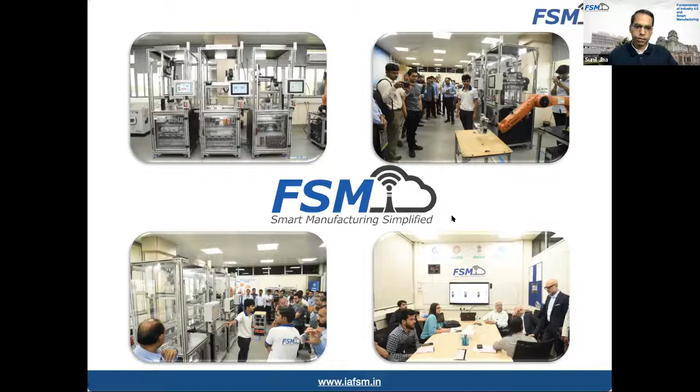Quickly introducing the FSM team working with us right now. We have directors representing industry as well as IIT Delhi. This entity, FSM, is basically co-owned along with industry. So we have Mr. Ravi Agarwal, Mr. Anup Wadhwa and Dilip Sahani from industry, representing the Automation Industry Association. And Dr. Anil Wali and myself are the representatives from IIT Delhi in this foundation.

Then we have a set of young engineers working with us day and night, experimenting with these technologies. We have people in automation and IoT, Mr. Arun Kumar and Vishnu Kumar. We have Rajesh Bhatt working on robotics and the implementation of robotics projects. Vaibhav Anand working on software development, whether it's AR implementation or backend work with Python and JavaScript integration, so he's developing those applications. And Naman Kapoor is looking after the administration at FSM.

So I'm introducing these people because during the course we have to go through some hands-on experiments and learning, and these are the people who will be helping you attempt that part. Then we have a lot of interns coming to FSM working on different technologies. Right now, Ronak, Atul, Omkar, and Amit are all working as interns with FSM.

The course faculty that we brought in for this course, as I briefed about the 6-day structure, includes people from various industries who will be joining these courses and the respective lecture sessions. We have Mr. Anup Wadhwa from Automation Industry Association, Mr. Kalyan Ram from Electrono Solutions, Mr. Sudhanshu from Pepperl and Fuchs, Pankaj from Rockwell Automation, Mr. Piyush from MathWorks, Tushar from PTC, Mr. Sarup Chand from Adroitech, and Mr. Praveen from Deloitte. So we have brought these faculty members from industry so that along with me, they will also share their knowledge and learning gained in the domain of smart manufacturing.

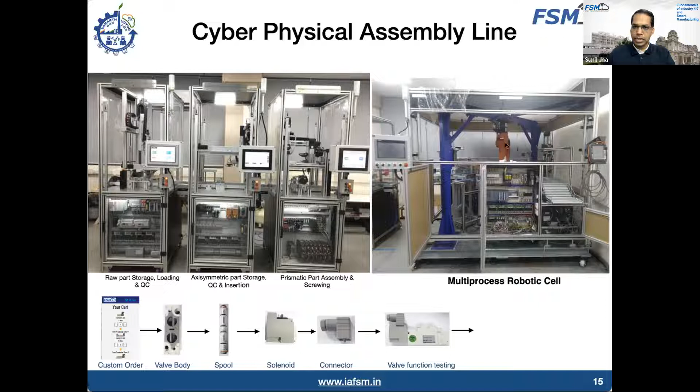Whatever these three stations are able to assemble, this multi-process robotic cell is also able to assemble the same component. But apart from that, it is also able to do functional testing of this developed component, which goes through testing and finally packaging. So starting from web ordering to final dispatch of the assembled product is all demonstrated in this small assembly line.

As this assembly line is going on, various technologies are in operation. The idea is that through this simple assembly line, we will be able to at least touch upon all the technologies and how they are going to help us in transforming the way manufacturing operations take place.

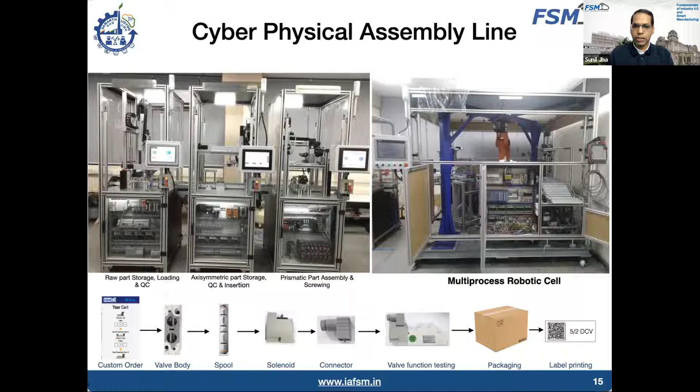So this is the facility, and another facility that we are working on. The previous one is the state-of-art facility which has been developed from scratch. We designed all the machines and systems and created this basic cyber physical assembly line.

The second facility we are working on and implementing is based on a cyber physical factory concept, which is basically a mix of new and old equipment. The idea is that most Indian industries come across this scenario where you have old machines which may not even have sensors and controllers, some CNC machines with PLCs, and some advanced new systems like robotic systems. We try to bring all these facilities onto one platform.

We are trying to transform our central workshop into a cyber physical factory, building everything from scratch with connectivity, upgrading basic legacy machines into smart machines, and developing the whole smart factory concept. This is a micro production system connected with automated material handling robots that you can see in between - a mobile autonomous robot with a collaborative robot on top, doing all kinds of material handling within the shops.

This is the one facility we are developing along with the previous cyber physical assembly line. This one is more related to manufacturing, so all machining, forming, welding - these operations are going on in this facility.

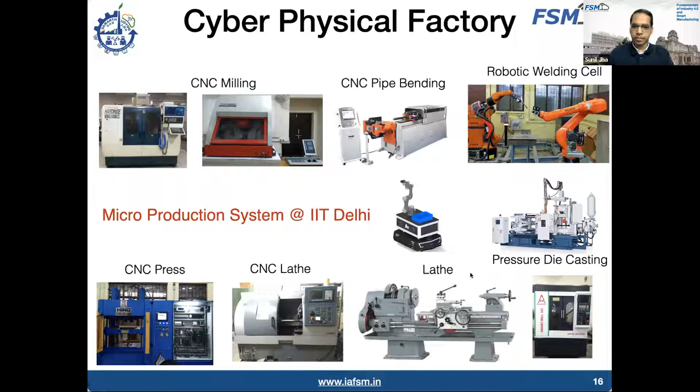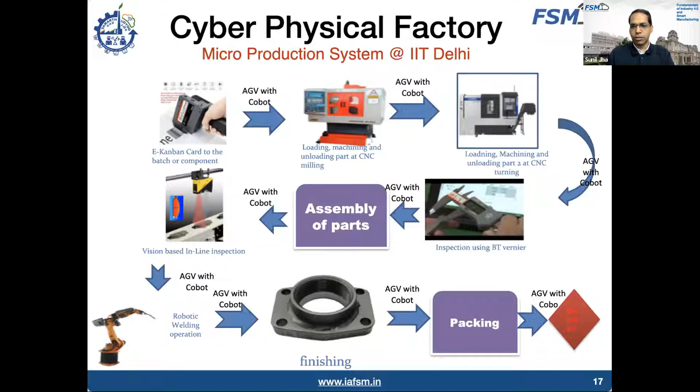We would like to demonstrate how track and trace will work in this case. Starting from basic raw material tracing, the material movement to different machines will happen, quality inspection can be implemented showing how inline quality inspection can be done, and finally the finished part can be dispatched to the customer. So this cyber physical factory is going to demonstrate all these functionalities.

Another facility that we have created is on the training part, because that's very important. Whatever basic infrastructure we have created is on the machine side, but at the same time we also want to transfer the learning to the learners, whether it's a student or people from the industry. So this smart manufacturing training system we have created in our lab, and we'll try to give you some hands-on learning on this system during the course.

The idea is that we should have a remote accessible training system, because these days we may not want everyone to come to the lab to learn it. So we will be providing these training systems accessible remotely, so they can learn these technologies we are talking about. We have this smart manufacturing training kit connected with electromechanical hardware as well.

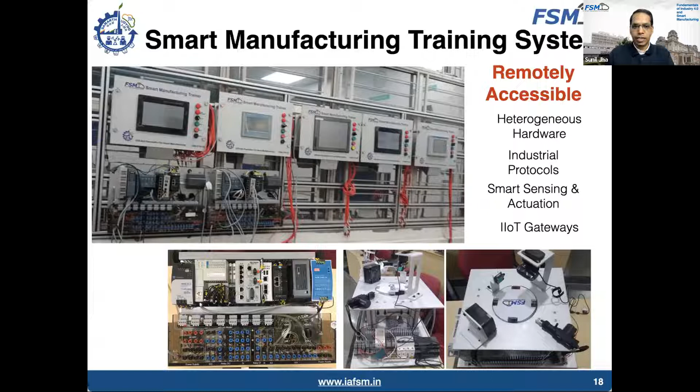This is a representation of a machine having 4 different stations with sensors, RFID, because I was hearing that you are implementing RFID projects. For those starting these initiative activities, it covers everything from basic data capture to taking it to the IoT platform and developing applications for the customer, showing how everything works in this scenario.

So that is the idea of creating this smart manufacturing training system. These are the trainers created on state-of-art industrial automation hardware, whether it's an IoT implementation on these kits or the smart managed switch for network security.

Hello. I think there is a glitch in Dr. Jha's connection, so we'll just wait for him to join us back. Yeah, he's reconnecting. I think something wrong with the network, it immediately gets switched off. So I'll just come back again. Yeah.

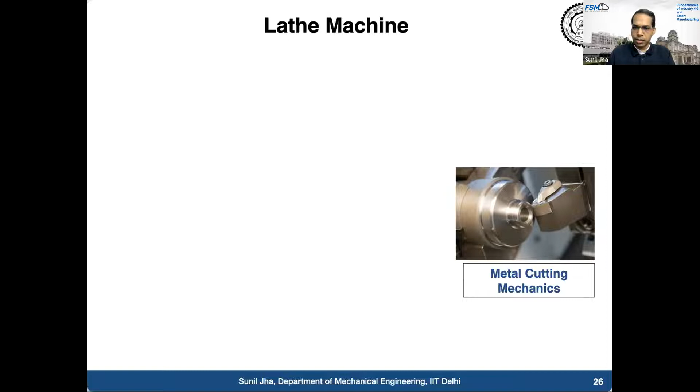We need an understanding of metal cutting mechanics, because someone has to figure out how metal can be given a different shape. If you want axisymmetric shapes, the metal cutting mechanics should be understood. There should be a cutting tool with certain angles, and when we engage with the workpiece material, we will be able to remove material in a particular shape. With that understanding, people came out with the concept of the lathe machine.

They understood what various relative motions are required in this lathe machine. The whole understanding of the mechanical system, the machine tool, and how you will be powering these machine tools should be there. This lathe machine started with the power source as a steam engine during the first industrial revolution itself. So the main source of power for this machine came from a steam engine, while implementing the metal cutting mechanics with the different relative motions given to the tool and the workpiece.

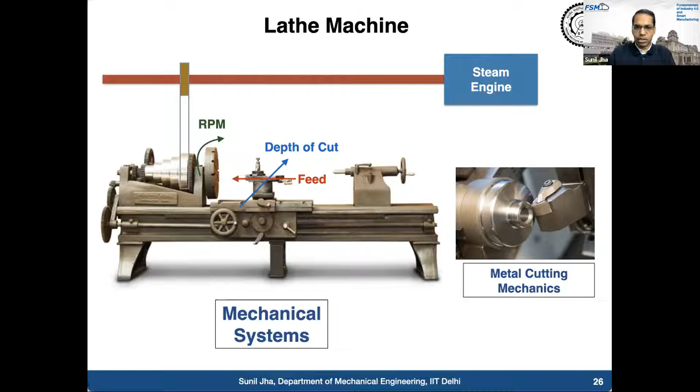That is how we can understand technologies starting to develop when we talk about Industry 1.0 - when you know the basic mechanical systems, and you try to build basic machines driven by the steam engine. That's how the first industrial revolution starts.

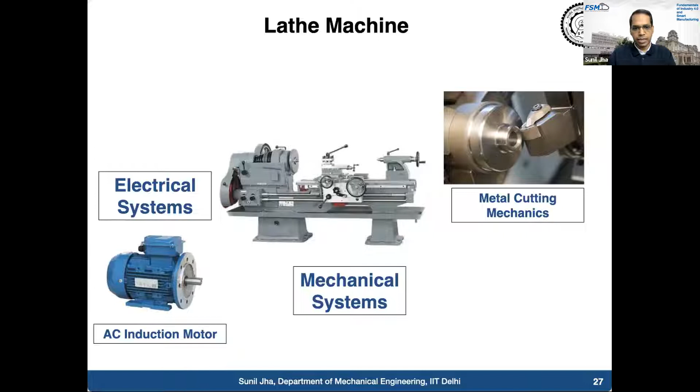Then we talk about the lathe machine again - the same mechanics is implemented, and metal has to be removed from the workpiece in the same way. Apart from the mechanical systems, you need to understand electrical systems as well, because now your machines are no more driven by the steam engine - they are driven by induction motors. So people with electrical system understanding put this motor together with the machine. The rest of the operations remain the same; only the motive power, the drive power, comes from the AC induction motor.

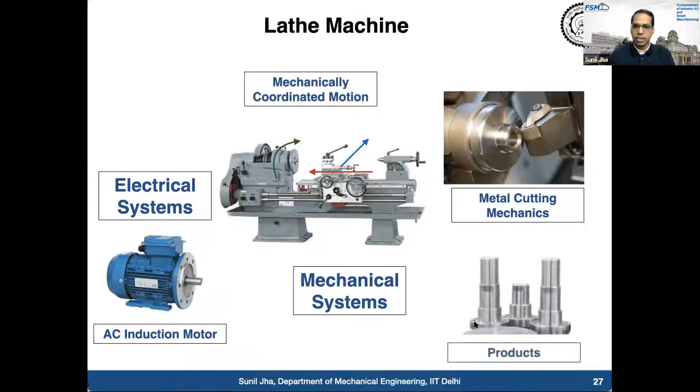The motions - the mechanically coordinated motion, whether depth of cut or speed and feed - are all given manually in these machines. So the understanding of basic mechanical engineering is still important, and you will be able to produce these kinds of parts.

Then if you go along, the transformation happens - whatever motions you give to the machine, as I mentioned in the previous slide, are all controlled by servo motors. That's how the concept of computer numerical control machines was developed, and we're all familiar with that since you might have seen CNC machines. As a mechanical engineer, we understand the CNC machine; as an electrical engineer, you understand the CNC machine. We also understand what kind of programs are running in this machine controller.

If you see how technology has transformed - starting from basic metal cutting mechanics, to how the system is driven by the electrical motor. Initially only the spindle part was taken care of by the electrical motor. But later we realized that whatever mechanical motions the operator gives to the part, in terms of relative motion between tool and workpiece, if coordinated and given properly, you can maintain better quality and dimensional accuracy. This kind of system developed with a lot of intervention of electronics and computing. So you need to have a mechanical system - you can't go away from that, because that is the actual foundation of your machine.

Then we need to bring out the electrical systems to drive the whole machine tool. So you will be having servo motors and drives running the spindle and the various axes of motion. And finally, you will also be bringing out the computing system, because now I would like to give instructions to this machine in the form of alphanumeric codes. That is the part program we put into the machine. Then the machine has to understand that part program and generate a suitable motion to cut the part.

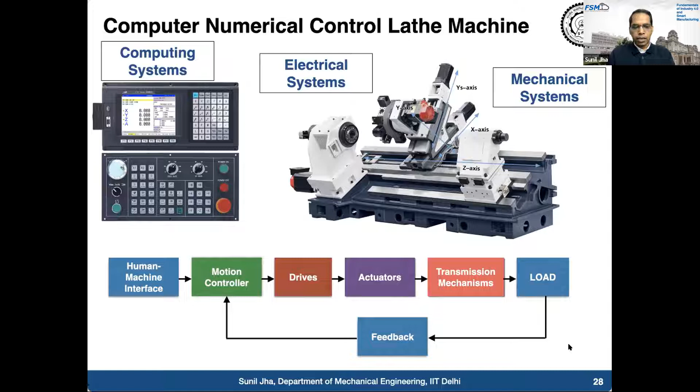So if you see that journey that has moved from the basic machine to this CNC machine, this has all been done as a part of Industry 3.0. In Industry 3.0 we witness all sorts of automation implemented in the form of these CNC machines, robotics and so on. Now, when it comes to Industry 4.0, what additional thing would we like to do here?

So I'm just giving you an example of a smart lathe machine. Same machine tool, nothing is going to change much in terms of the basic metal cutting mechanics. The only thing we are looking forward to now, beyond the conventional automation, is to build more services on top of that.

So what we would like to have is automation that doesn't merely give product quality. What we are looking at, even on legacy or conventional machines, is how we will be able to ensure that product quality is maintained irrespective of the operator operating it. So we need to build services which will help in getting the right product quality from this machine.

We'll also be looking at monitoring the health of the machine continuously, along with its precision. When we say health, we certainly mean the precision of the various components or sub-components used in the machine. And we also look forward, when we talk about conventional lathe machines, to guiding an operator in some way so that we will be able to maintain the product quality we are talking about.

To achieve this basic functionality on conventional machines, we need to think about the kind of integration we are all doing, or may be doing.

So I have heard that you started some kind of Industry 4.0 projects, and they may look similar to this. I'm just giving you a very crude or raw example of a conventional legacy machine. If you have a CNC machine, you have a better prospect of integrating that machine, but let's take a very raw case here.

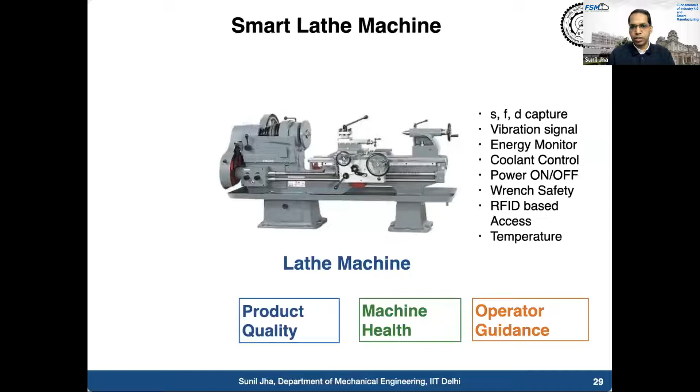My intent is that I should capture some of the important parameters from this machine. So I will be thinking about what are the critical parameters for this machine. We understand that speed, feed, and depth of cut are very critical for a lathe machine, and that directly translates into product quality. So we need to think about capturing these parameters from these machines.

Then, when we talk about vibration in the system, we are interested in capturing some vibration signal from this machine. Power consumption by this machine is also a good indicator. Sometimes when parts wear and tear, there's a large amount of energy consumption, or a change in the trend of energy consumption by the same machine for the same part. That's also a signature we need to capture, so energy monitoring is an important part of this.

Certainly some kind of controls we would like to implement, such as coolant control and power on/off of the machine to be monitored. There are certain safety measures that can be implemented on this machine, because we are talking about Industry 5.0 now, which is also about making the whole system safe for humans to operate and work in this environment. So safety is one area where such features can be implemented.

RFID-based access, because we want to record who is operating the machine and which part is being produced by that person. So there's some kind of traceability of the components, as well as traceability of the operator who has used this machine. We have to provide some kind of access system here, so RFID-based access will also be a part of this, and certainly monitoring of the bearing temperature.

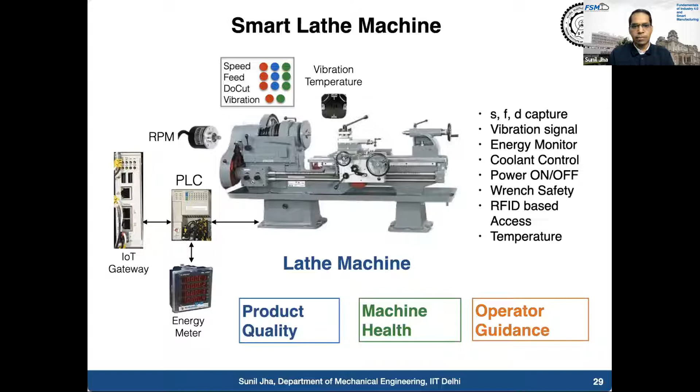So we are looking forward to this kind of implementation when we talk about Industry 4.0. The cyber-physical connection is a very important part of this implementation.

So the four design principles and goals for Industry 4.0 — what we are looking forward to first is interconnection, the connectivity between the machines, devices, sensors, even people, basically how they will be able to communicate among themselves. That is the first design principle, that whenever we are trying to implement Industry 4.0, connectivity is an important pillar.

So those who have already started this journey may understand this: the first thing is to extract the data from the machine and then take it somewhere else. That somewhere else could be a server, or another machine or system that will make use of that information, or it could be a mobile application where we will be taking this data.

So this interconnectivity between the machines, the sensors, and the people is a very important element of this. Now, once you establish connectivity, the second design principle is information transparency, because that's a very important pillar of Industry 4.0.

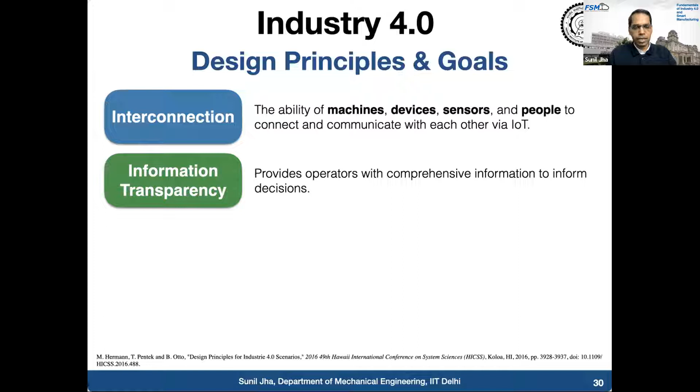As we implement smart manufacturing, information transparency will be there, providing operators or decision makers this transparency. They will know that information, and all decisions come out with the knowledge or information they are looking at. So informed decisions come out from the actual data once we implement information transparency. Another design principle for Industry 4.0 is technical assistance.

We are looking to empower people with the help of technology. So Industry 4.0 doesn't only talk about machines and connected systems, we are also talking about assistance to people, actually - the technological facility of the system to assist a human in decision making and problem solving.

So with the help of machine learning and deep learning implementation, inferences can be made based on the data, assisting and helping in decision making. At the same time, to assist someone to solve a problem in the field, technological assistance in the form of technologies like augmented reality will help guide people in problem solving. This is another important pillar for Industry 4.0.

And lastly, we are talking about decentralized decisions. Rather than everything coming to one central system and the decision being communicated to the machines, we want decisions to be taken by individual decentralized components, or different hardware near the machines themselves, or the machine controllers themselves - the distribution of decision making. So decision making should happen at the machine level itself, with the help of the cyber physical connect.

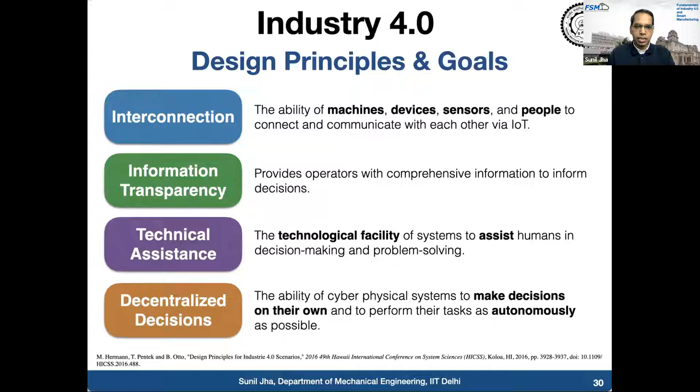So this is the basic design principle, and all the technologies we will talk about will at least try to implement some of these design goals. Now let me take you to this important slide on manufacturing challenges, because whenever we talk about Industry 4.0 or smart manufacturing, we always think of the manufacturing challenges already existing in the facility we are dealing with. When we talk about Industry 4.0, we see it's a next generation of technologies for a futuristic manufacturing setup.

What do we do with the existing manufacturing challenges? Our manufacturing challenges are always in the form of either higher rejections or very little insight available on what is going on in the factory - lack of operations insight. That's why you try to connect the machines, connect the assets, and build more dashboards, because that brings out the insight. Wherever it's not available, you're always in the blank, not knowing what's going on - where is the fault, where is the problem area in manufacturing or maintenance.

Lack of operations insight is a very big driver for this, and most manufacturing facilities and setups experience these issues. Then there's suboptimal process control - we run processes and manufacturing operations, but they're not running at optimal conditions. Sometimes we tune these operations initially, but then we aren't continuously monitoring whether they're running optimally or not. So suboptimal process control is another challenge we always face. Long setup and production time is another challenge, and unprecedented downtime is very critical whenever an important asset fails all of a sudden - that's a very important part of your manufacturing setup.

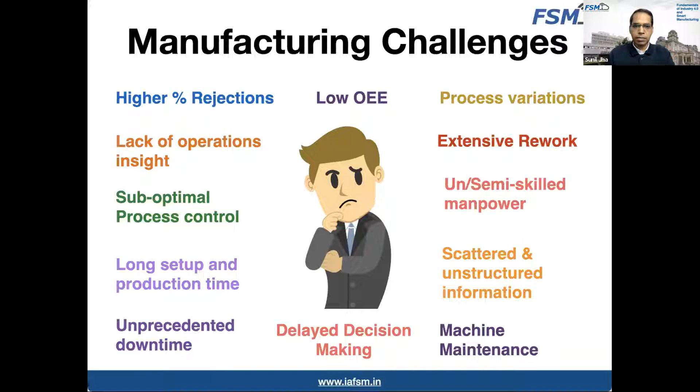So this is the slide we need to understand in a better way - on one side, we all are familiar with our own challenges. Maybe after this understanding and discussion, you may write down your own challenges - that's a very important part. I have already written based on my interaction with the industry and understanding - these are some of the challenges. You may increase that list further.

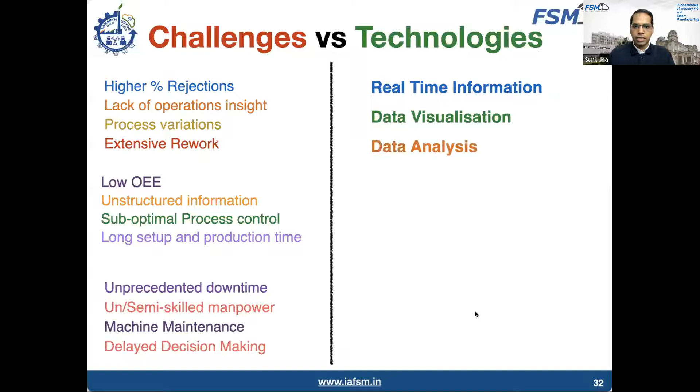And on the other side, in these 6 days, you may come across and understand the various technologies that we will be sharing with you - real-time information, data visualization, data analysis, remote maintenance, smart machine interfaces, augmented reality, AI machine learning. These are all technology baskets or components relevant and important for smart manufacturing understanding.

These are two different scenarios - on one side, you have your existing factory challenges or setup challenges, and on the other side, we are trying to learn more and more advanced technologies. Now, unless we marry them or match them - which challenge is getting solved by which technology component - unless we come out with that visualization and understanding, this learning will not be helping us. It is not going to be implemented. So it's a very important exercise for all those who are having field experience and learning these new technologies.

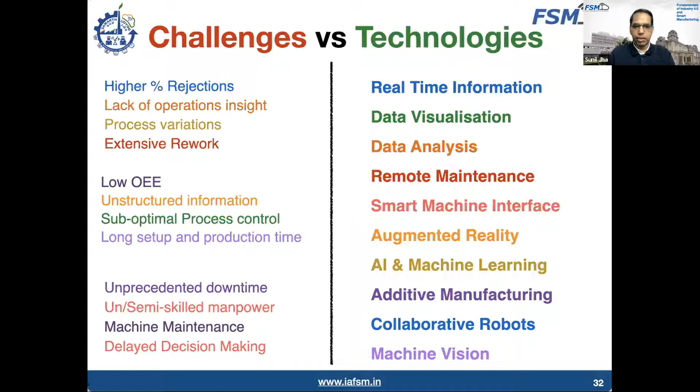They should understand that this particular technology is going to help me in solving this particular challenge. So please be ready to prepare this kind of list for you. As you go along with the various technologies listed on the right-hand side, as we discuss more detail about these technologies, you should start thinking and matching that - and that is something coming out as a project. Whenever you start thinking about implementation of these technologies to take out some of these challenges from your existing setup, then you are implementing Industry 4.0.

Let me give a quick glance of a digital enterprise, because that's a very important thing we are moving towards. Today we are trying to implement digitalization, trying to do everything digitally. So when we talk about the digital enterprise, we need to understand what exactly we are doing. When we talk about manufacturing, we are doing design, manufacturing, producing some products. To manufacture the products, we need to bring together multiple components, sub-components, raw material. So the supply network is very important, and the distribution of the final finished products. These are the key important pillars of all manufacturing setup.

Then you see the word 'digital' in front of all these terms: digital design, digital manufacturing, digital product, and the digital supply chain network. Everything is connected together with information exchange between all the digital environments in the enterprise, and that we call a digital thread. It means all the activities in the plant and the enterprise are now being shared digitally. This highway of communication, which shares this information digitally, we call a digital thread. How you will establish that digital thread, how you build it up, is an important part of this. We are certainly looking forward to migrating our existing manufacturing setup towards digital enterprises.

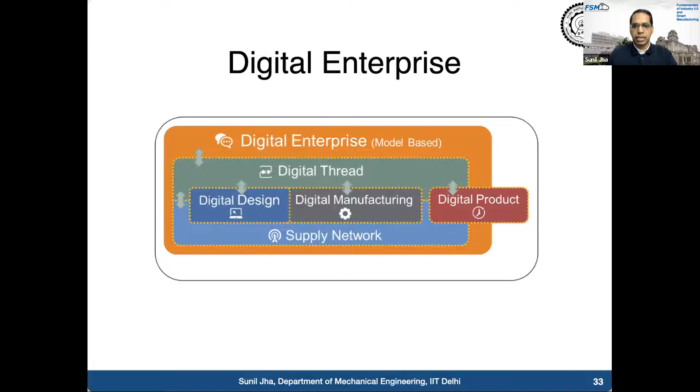So this slide is just giving you a quick glimpse of what exactly digital enterprise means and what digital design is. I'll zoom into this a little bit to understand what exactly I'm talking about. When we talk about the digital enterprise, we'll be talking about the digital organization, digital enterprise content management, enterprise risk management, the research part.

Then as we go deeper into the manufacturing, when we say digital design, we are all familiar that most design activities are done digitally today. We have to use CAD packages, analysis packages, design the product, evaluate the product reliability. So all sorts of digital tools that help me perform these activities make up digital design.

Then we talk about digital manufacturing and processing. Here we need to monitor the manufacturing and processing systems, control them digitally, and we also perform some simulation before we actually take it up to manufacturing. If we do all these activities digitally, we call it digital manufacturing and processing.

Same way, we are looking forward for the products. Now no more products are made without sharing something, because when we talk about the digital economy and digital enterprises, we want these products to share information back to the system. So we are looking for more digital products which will share information about their utilization and their current state. That is how digital products are coming up.

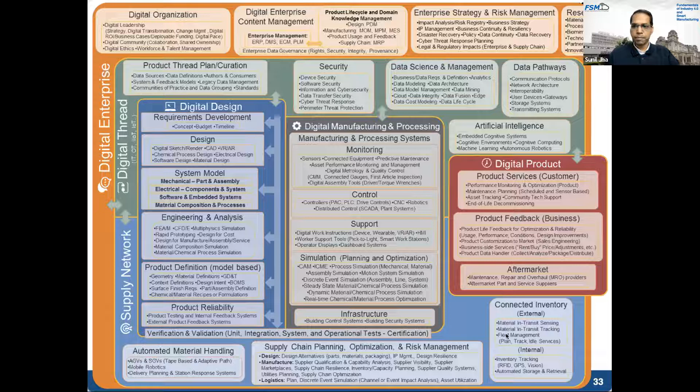What are the technologies which are going to shape the future of manufacturing? Some of these we are accepting today, some we still think are futuristic. We may need to learn them, but later on they may not impact activities right now. But they are going to impact your manufacturing setup - that is what this report says.

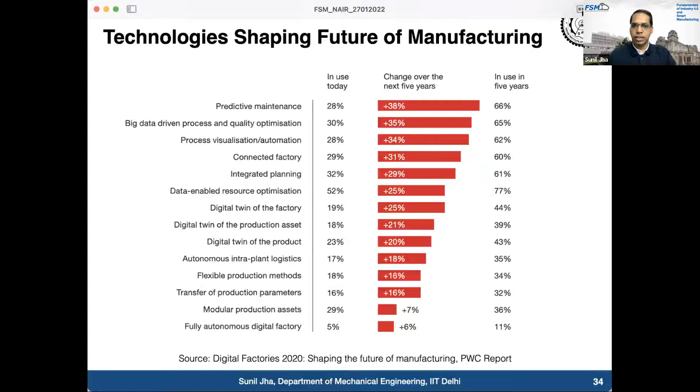So we are talking about these technologies. We need to learn these technologies ourselves, and we also need to learn how to implement them, because most of the time those who are developing these technologies may share only limited know-how with you. It's very important to understand these technologies in depth, to the extent that you will be in a position to implement them yourself. That is the idea behind this FSM - that we all are spending our time understanding these technologies so that we can enable people from manufacturing to at least implement them.

So we are working on these technologies in FSM. Now let us come to this assignment, which will be due for submission by tomorrow. I will be enabling this assignment on the website. It's on redefine the Industry 4.0.

Now, when I was mentioning about the Industry 4.0 design goals, and the challenges in manufacturing, from that perspective, how do you see Industry 4.0 helping in whatever initiative or activities you are doing? This assignment is about identification of the key improvements in the next 5 years. So whatever operations or activities you are doing right now, can you define, can you write down what Industry 4.0 means to you?

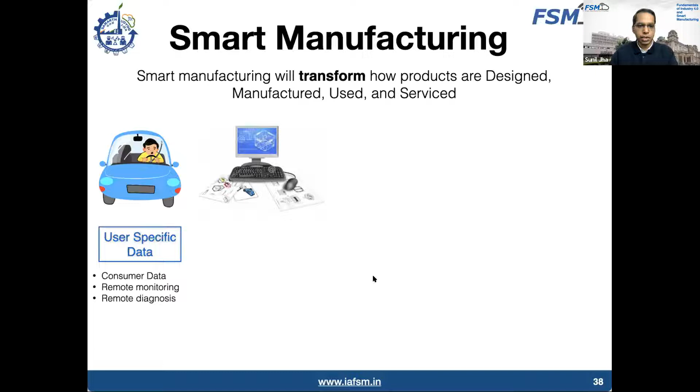In the same way, manufacturing products also start with user specific data, because when we talk about customized manufacturing, we talk about starting the whole activity from user specific data. You have to get consumer data captured from products already in the market, or from various sources, as input to start your design process. So with user specific data, the whole design process begins, product design using customized data.

You may explore this, as I'm sharing it within the broad concept of Industry 4.0. People are talking about customized design and customized products, how it is relevant and in what scenario it helps. That is what is coming as a redefinition of Industry 4.0. This may or may not be applicable, but if it is, it's nice. Otherwise, you can redefine how this whole activity applies around the activities you're doing right now.

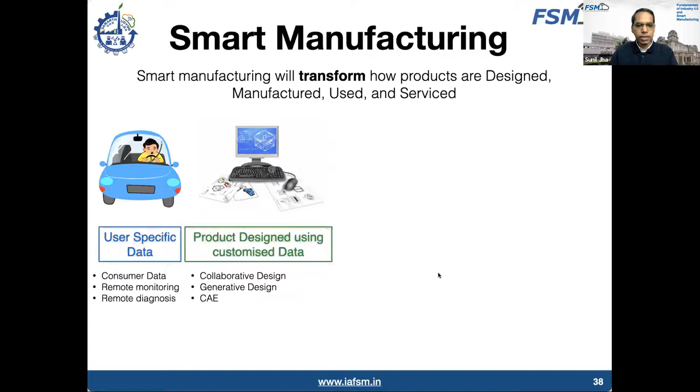So we are talking about the capture of user specific data. Then from that data, we would like to design a product which is user specific, of a certain need, and which helps the customer in some sense. So we are talking about technologies that help us design a product which is user specific. Then we are talking about digital manufacturing technologies, how you are going to manufacture this product.

So all sort of digital technologies are involved - the data-driven operations, the flexibility in manufacturing, how real-time changes can be implemented. So all these technologies are playing a key role in implementation of digital manufacturing.

Post that, once the product is delivered, the input from the remote product, or the product being in use, how the data from that product is going to help. So remote diagnosis and reconfiguration can be possible on such connected products. All sort of fault diagnosis, the kind of maintenance that can be given to the product by the engineer, the service engineer, or sometimes the user, and collecting the part failure data for improvement of the solution.

So if you see the whole spectrum of the digital connect here - starting from user specific data, designing the product using the customer data, then manufacturing the product accordingly, and finally the product that is delivered is continuously monitored and gets connected. So we talk about smart manufacturing in totality like this, and we will be embedding the intelligence at the different stages here. So that is what we try to manufacture with the intelligence. This is what we understand the smart manufacturing concept.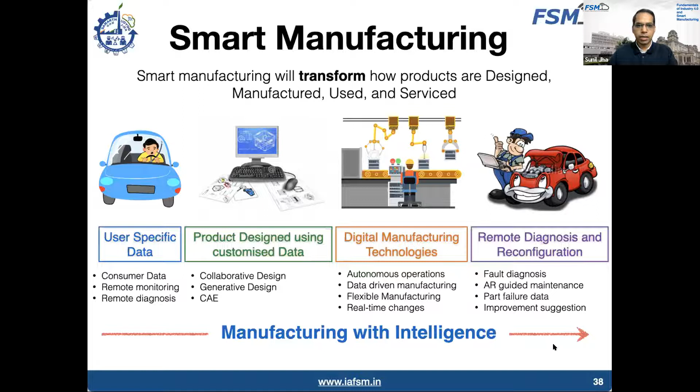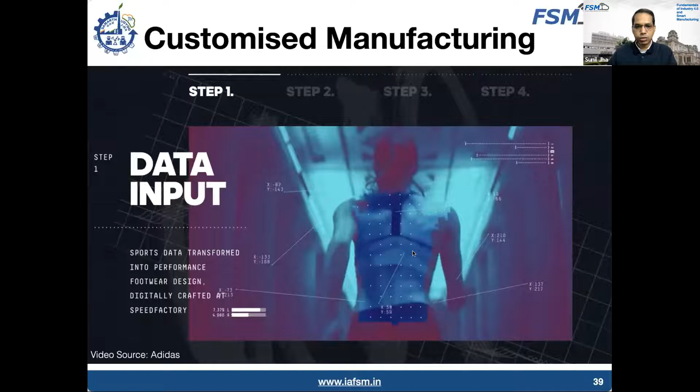Let me take you through this quick snapshot captured from Adidas. The 4 steps which I have just explained to you are being reflected in this video. Adidas are basically manufacturing shoes - this is all about how the shoes are being designed.

The initial data is captured from the shoe itself. It's an instrumented shoe which has some sensors. Then based on the user who is going to use it, the data is captured, and using that data the product is being designed.

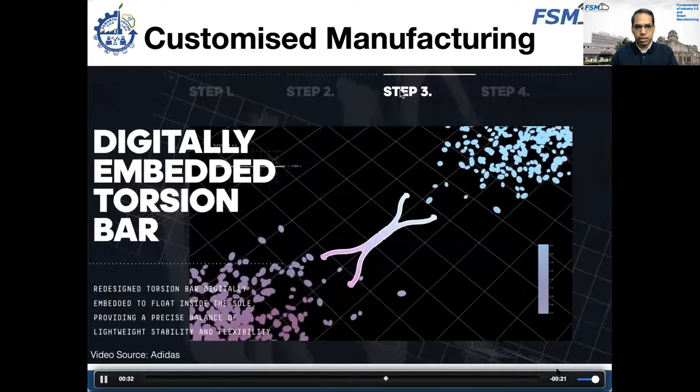There's a unique member inside this shoe which takes care of the forces and torque, and that is specific - how the strength of the whole shoe is designed is based on user specific data. Finally, this torsion bar is embedded into the product. So now this unique customized torsion bar is embedded into the product, and then there are advanced manufacturing processes so that you can make this product as quickly as possible.

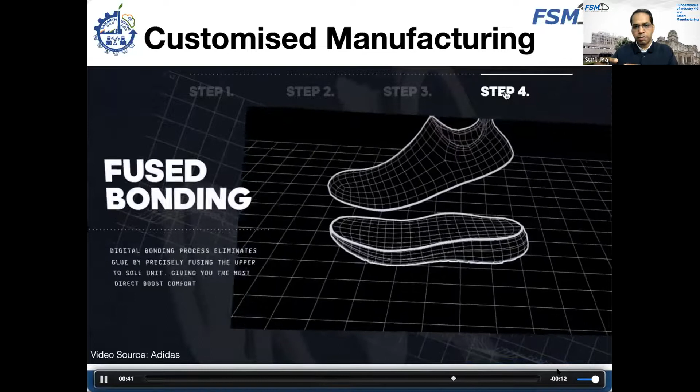Started from basic input data, the design of the whole shoe has been done based on who is going to use it, for which sport he is going to use it. And this unique element of the product is digitally designed so that it will meet the requirements of that application. Finally, suitable manufacturing processes enable it to be manufactured in this fashion.

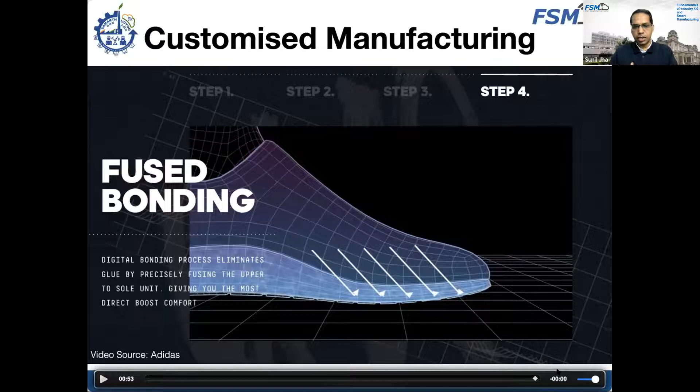So the idea is, though I have given an example of a shoe, these 4 steps are equally applicable to any product we will be talking about in terms of manufacturing. So then you can think about how this can be taken to some of your applications or some of the services you would like to deliver.

Now, when it comes to smart manufacturing, we need to see the economic potential. What is the economic potential here? Let me just quickly brief about that.

As I was mentioning earlier, it has to help the acceleration of the decision-making process and the adaptation. So there are two important advantages or benefits that we can reap from these smart manufacturing technologies. One is certainly the acceleration of the corporate decision-making process and adaptation, and second is the agility - how we can implement those real-time changes that are required.

So if we have to manufacture something from the existing facility, how can you basically make your facility configurable to produce something different which is required, or later on when you see the mix of products, how they can be manufactured. So we will be focusing on these two things, the agility part as well as the acceleration of the decision-making process.

So adaptation - let me explain how these technologies are going to play a role in the decision-making process. I'm just taking you through two different scenarios, the current state of adaptation or current state of decision-making, how that will happen.

So I'm just reflecting you with one facility - this is one of the manufacturing facilities. There are certain equipments which are performing some operations and they get some event. So we call this an event that your panel temperature is now increasing - so this is one of the events.

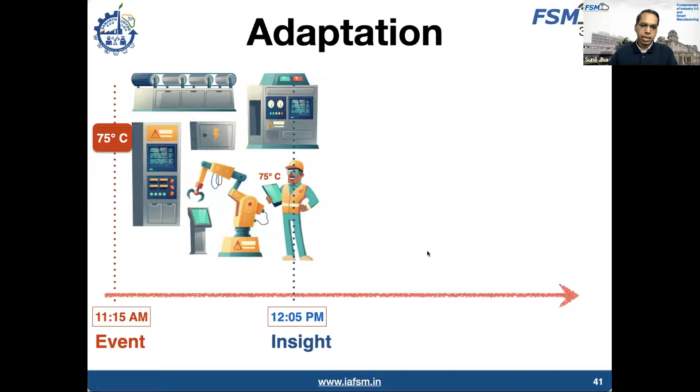So this is the point of time when the first insight about this anomaly is available. We call this insight being available at 12:05. When the event takes place at 11:15, you may have less or more time for getting this insight, and this delay is what we call insight latency. Whether it's insight about your own manufacturing operations, processes, or any other services you're giving, this is the first time the information is available to you.

So that's the first insight you get into the event, and that is the insight latency. Now, after this insight, you will be communicating to someone to understand why this is happening, so there's an analysis process that starts. Someone who is expert in doing the understanding or calculation from their own experience and learning will be able to come out with a certain analysis or understanding of this behavior, and the delay that takes place while the person analyzes and comes out with their report, we call analysis latency.

So after the insight, to understand why this is happening, what are the causes, how many times it has happened in the past - all this information is processed by someone who knows the system well, and that is what we call analysis latency. Whatever delay happens during this period, we call it analysis latency.

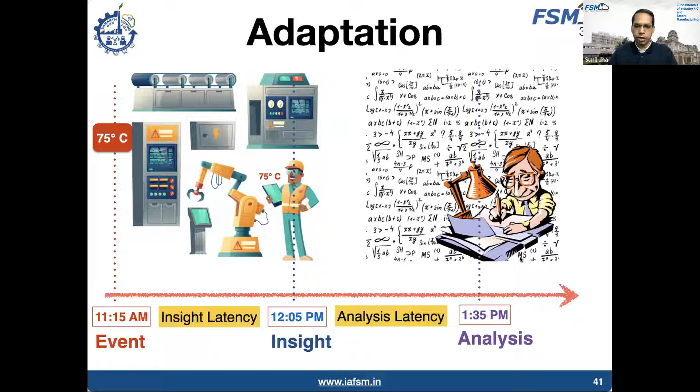And after you analyze this data or behavior, you submit this information to the decision maker, because the person analyzing is not going to take decisions. So then someone has to look into the details of the analysis and approve certain measures to curb this anomaly. So there is a decision-making delay - after the analysis, there is a decision latency that comes into picture.

And as you go along, you see that there is a time lag being produced. So at 2:45, the decision is being approved now. Again, approval of decision doesn't mean the decision is being implemented actually - there's another delay involved, that finally someone has to go from maintenance to implement those decisions. So at 3:15, we find that someone will go make those changes, replace components, whatever needs to be done to bring the temperature within limits. This time spent after the decision is approved till it takes place and the measures become effective - we call this action latency.

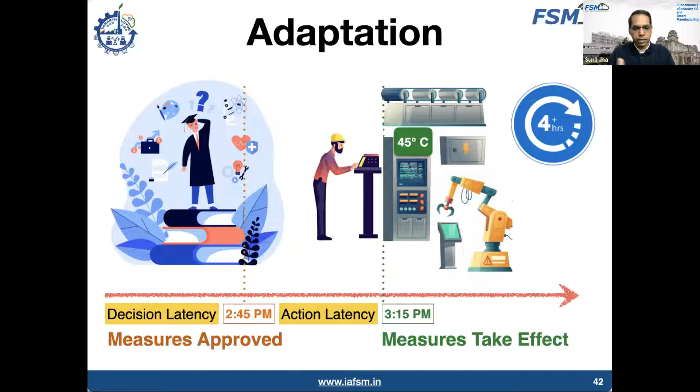So in the whole process, from the moment the event happened in the plant or facility, by the time the final measures took effect and were implemented, you already lost some time. In this hypothetical scenario I've explained, you have already lost more than 4 plus hours. I'm just considering one of the situations - sometimes it may be a complete shift, sometimes a whole day. Even when the event happened, you don't know about it. So you can see that you have lost important production time, and each minute counts here. You already lost 4 plus hours in this case.

This is a conventional adaptation process or decision-making process, how it works basically. Now let's look forward to a scenario which we are talking about now. In that case, the same event took place at 11:15 a.m. Now we already have a system in place - we have already implemented the IoT. We are talking about starting implementation of IoT, but for what actually? Because the moment this event happens, immediately you get to know about the alert.

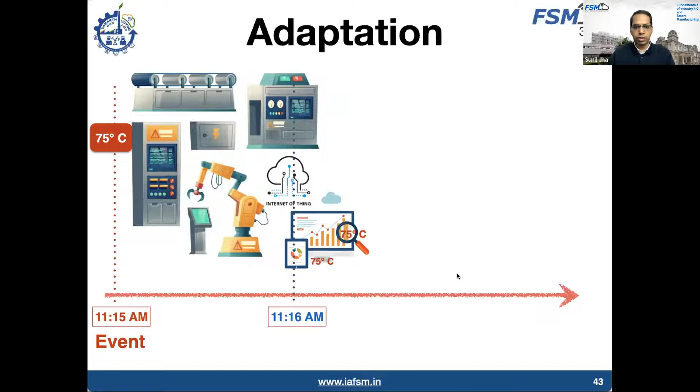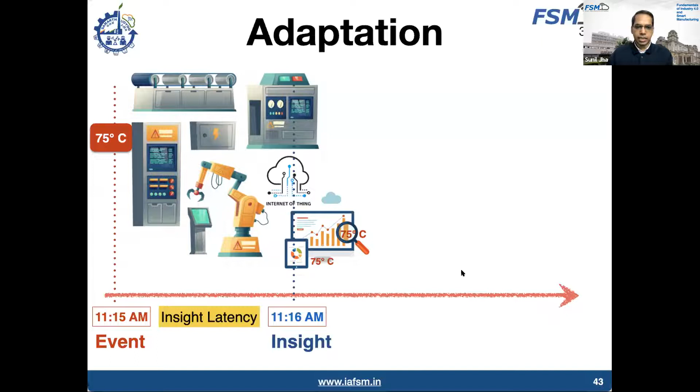So you get through either the dashboard alerts, or you'll get a message on the mobile phone, or something is available to understand there's something wrong with the panel. And you see that immediately the insight will be available. So you cut down this insight latency to a great extent if you build real-time capability in the system, and this can be built with the help of various technologies, which is what we are discussing during this course.

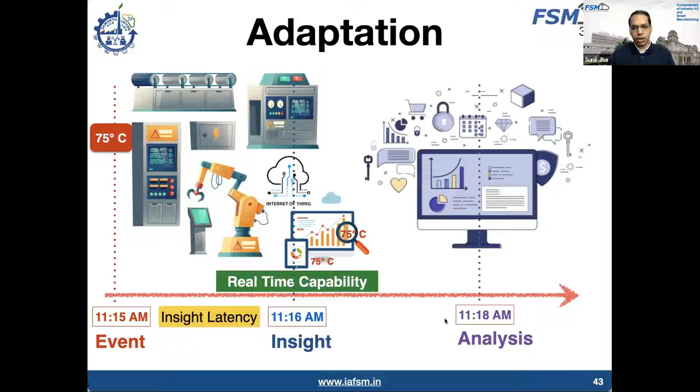Once that event insight is available, we don't want people to just start understanding why this has happened manually. Now you have enough data available to complete the first-hand analysis. Whenever such an anomaly happens, your system will immediately analyze the data using various technologies to bring out relevant information, such as the cause of the event, why it happened in the past, and the frequency of its occurrence. So initial analysis can be done very fast, finishing much faster with data analytics and ML technologies, reducing the analysis latency time as well.

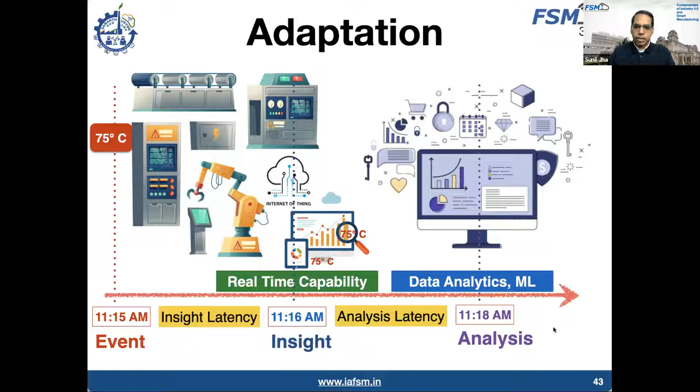Post that, we still want someone to approve the decision, but you build a decision support system so that information is presented in a way that accelerates decision making. Sometimes this involves prescriptive analytics, prescribing probable actions you can take. With data presented in the right visualization form, decision approval will be faster, cutting down decision latency to a great extent. So though we are still dependent on a human to take the decision, it is accelerated greatly with the help of technology, and this lets us cut down the decision latency.

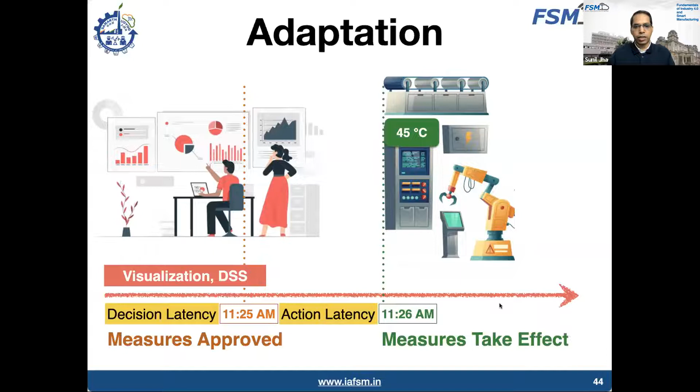Post approval of the decision, say to adjust certain parameters, your system should be adept enough to make those changes itself. This is the last stage of implementation of the measures. If you have cyber-physical integration in place, with your systems connected to the decision-making system, the moment you select an option, the system will reconfigure and readjust those parameters, unless a physical replacement is required. So across this whole sequence of event and decision making, implementing the right technologies lets you cut down a lot of latency, and reducing latency means greater advantage for your organization or facility.

In this next scenario I explained, you spend 11 minutes doing that, and out of that 11 minutes, 7 minutes are based on the decision approval part, which is human dependent. Later, when we talk about decentralized decision making, where decisions happen autonomously, we can further cut down this time. So we're able to reduce or save a lot of production time, and that's the advantage of implementing these technologies. This is just a quick example of accelerating decision making through integration of various technologies, from building real-time capability to final cyber-physical integration.

So now you understand the pillars of technology, where exactly they play a role, and how they help in reducing lost time, whether it's breakdown maintenance time or production loss from something not being communicated in time and acted upon. This is the bigger advantage we are looking forward to from this implementation.

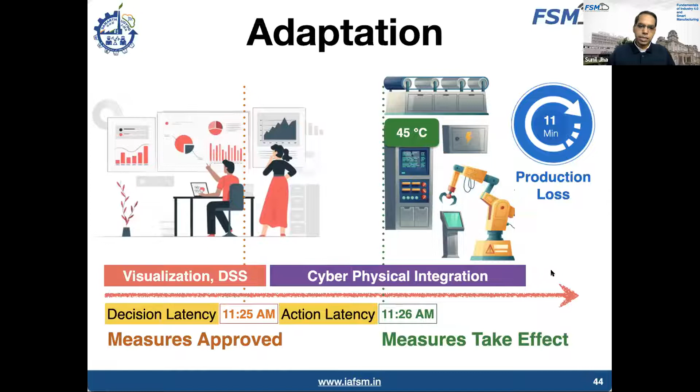When we see the important characteristics of smart manufacturing, we understand that we are talking about implementing Industry 4.0. We are all talking about implementing smart manufacturing, but we need to understand the key characteristics of Industry 4.0. Understanding these will help in knowing where we are and what is left to implement further.

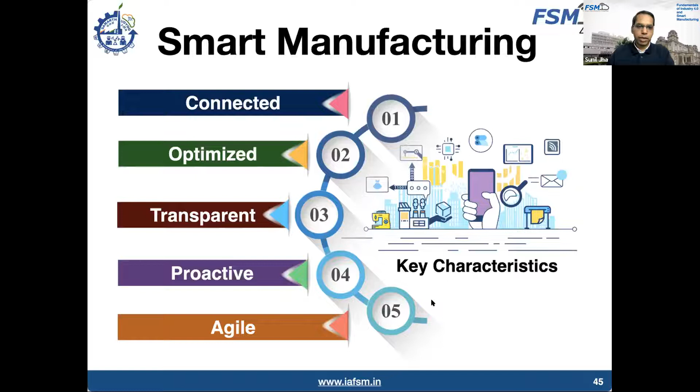When we talk about connected, what does it mean? Normally we understand that when you get data from a machine, you establish a connected system. But connectivity is more than that. Continuously pulling location-specific data with sensors is certainly the first step required. But more than that is how you build data-enabled collaboration in real time, whether between supplier and customer, or within the organization itself, between different departments. So connected doesn't just mean getting a machine connected and getting data out of it. It's more about enabling different types of collaboration in real time.

Whether information relevant from production to quality is available in real time, or something changed by the process engineering person is available to maintenance in real time - if this kind of information exchange happens in real time, we call it a connected enterprise. Then we can do all sorts of collaborations based on real-time data.

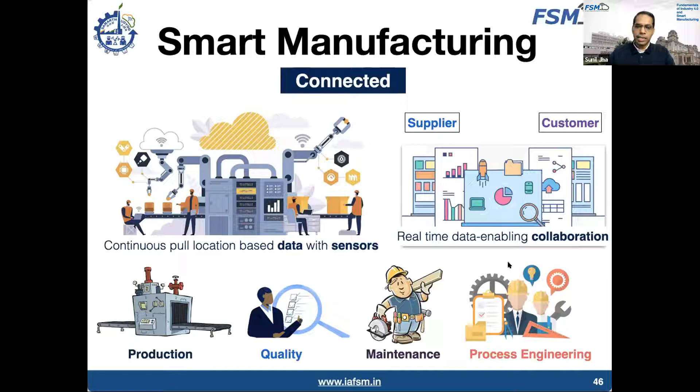Then we talk about optimized, running the facility at optimum conditions. That's one of the challenges - we don't run facilities in optimal conditions most of the time. So we're talking about reliable and predictable production capacity. This word is very important. When I say predictable production capacity, I'm certain my equipment will behave and perform reliably so that I can produce a certain number of units in a day.

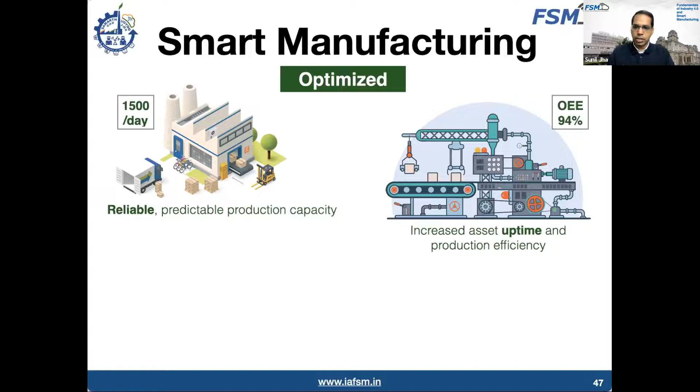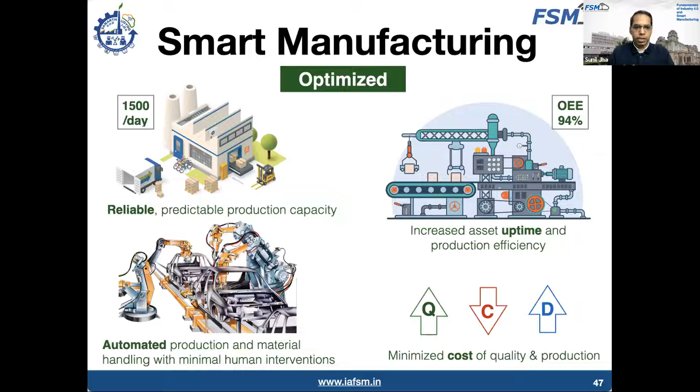This is possible only when we run the facility in an optimized way - meaning I get high uptime. I'll be running my facility at more than 94-95%, at higher production efficiency, with material handling automated with minimal human intervention, saving a lot of time in changeovers. We'll be able to produce the right quality and quantity at minimized cost. Unless you can do that, you won't be running the facility in an optimized way.

Then we talk about transparency - once data-enabled collaboration is possible in the organization, all decision making happens based on real-time information. Decisions aren't guesses, they don't just come from experience. Experience is important, but it's combined with real-time information, facts, and insights. This kind of live metrics helps you take better and more consistent decision making. It's not that two people take different decisions, because if they're based on similar data and insight, they converge to the same decisions.

Then you can have better demand and forecast - customer demand forecasting becomes possible once you have connectivity with the customer and real-time data is available to you.

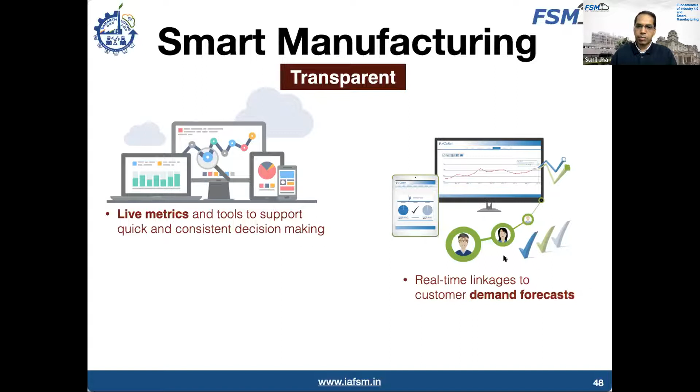And certainly in case you are tracking the various activities during the supply chain, that is also possible. So transparency, the IT systems build a lot of transparency in the whole system. So whether it's train services or any other consumer services, transparency basically builds more loyalty in the customer, as they get to know where the things are and what the situation is.

In case of a train tracking system, if the train can be tracked in real time, the customer at the station and platform feels comfortable because they know it is going to reach - it's not completely based on announcements. They can easily see whether it has left the previous station or not. This kind of transparency is very important in the system, and we are looking forward to such transparency in manufacturing systems as well.

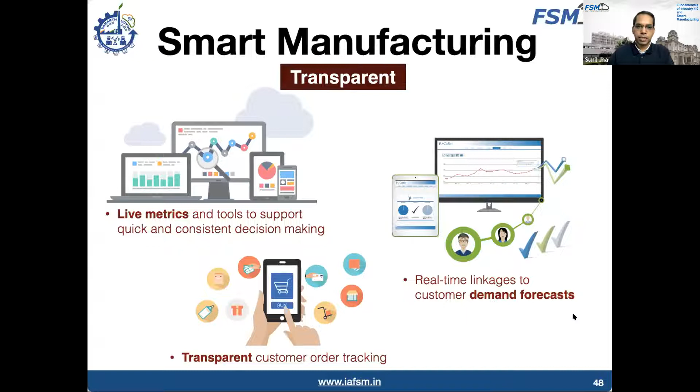Then quickly we talk about the proactive feature. The proactive characteristic means you are detecting the anomaly in the system, and once you are predicting the anomaly with the help of the data coming to you, you will be proactively taking action, preparing the whole system in advance.

So in that case, if a spare part is going to be replaced, you will be ensuring that the replenishment or restocking of that component happens automatically. The system will be triggering those activities in time.

And more importantly, how will you be able to detect quality issues at the supplier end? It's not just in your own facility, because you are also dependent on suppliers who will be supplying these materials, and finally you will be assembling or doing the final manufacturing activity at your premises.

But before the component comes to you, you will still be able to analyze the information at the supplier and come to know that this lot is not as per the quality standard you are looking for. So before it reaches your premises, you can stop that activity, monitor it, and take corrective action in advance so that last-moment surprises will not happen.

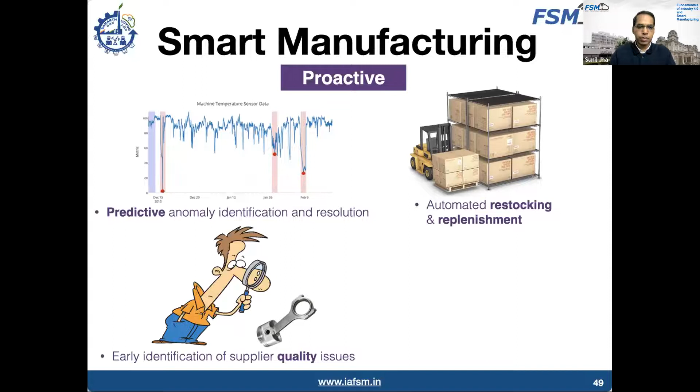So these kinds of proactive steps are important characteristics of smart manufacturing.

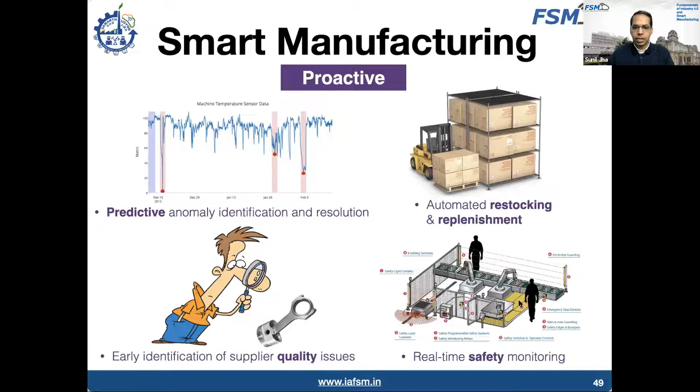And certainly safety is another important measure that we would like to implement - real-time monitoring of safety, so that you can take action before the actual situation leads to an accident. Those actions can be taken in advance.

Lastly, I will be talking about agility, because we are talking about flexibility in manufacturing. You may not be doing mass production of the same goods that were produced earlier - otherwise we will not be migrating towards Industry 4.0. We would like to have more flexible and adaptive scheduling.

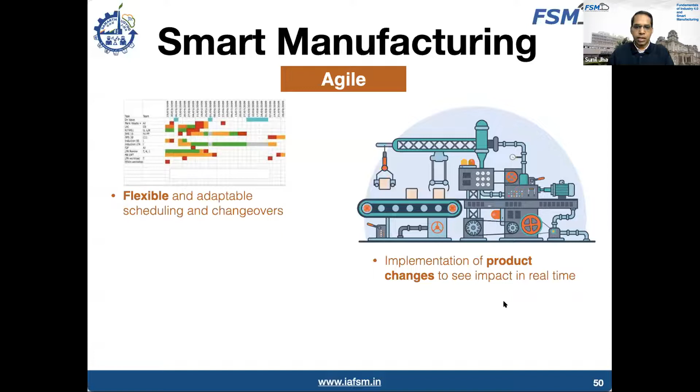So certainly real-time changeovers can be possible, and real-time product mix can be produced. When we are creating new facilities, we are looking forward to configurable factory layouts, because that's the only way you can bring agility into the system. Based on new products and product mix, the facility can align itself to produce a particular mix of components.

That is what agility means, which is more important because in future we are not going to be too dependent on the same mass production. The product mix has to be changed as per customer requirements. So agility is another important characteristic that will come up once we implement these technologies.

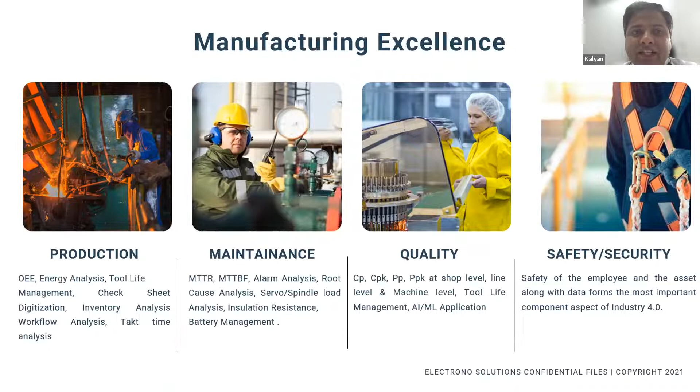ये सब फैक्टर्स हैं मैन्युफैक्चरिंग एक्सीलेंस अचीव करने के लिए। इसमें बहुत सारी टेक्नोलॉजीज का उपयोग हो सकता है, जैसे इंडस्ट्रियल आईओटी प्लेटफॉर्म जहाँ सेंसर्स लग सकते हैं, मशीन्स को कनेक्ट करते हैं। मशीन कंट्रोलर्स जो है पीएलसी कंट्रोलर या सीएनसी कंट्रोलर, उसमें से डायरेक्टली डेटा निकाला जाता है, जहाँ से सिस्टम परफॉर्मेंस और सिस्टम अवेलेबिलिटी के बारे में बहुत ज्यादा इंफॉर्मेशन मिल जाएगा।

ये मैं अभी आपको ऑटोमेशन और आईआईओटी में अंतर और उसके कन्वर्जेंस के बारे में थोड़ा डिटेल में एक्सप्लेन करूंगा। जैसे ऑटोमेशन में बहुत सारे टाइप्स ऑफ ऑटोमेशन होते थे।

अगर इंडस्ट्री 3.0 जनरेशन का लेंगे तो वहाँ मूवमेंट ऑफ मटेरियल का ऑटोमेशन होने के लिए रोबोटिक्स यूज होता था, जहाँ ऑपरेटर एरर्स को कम करने के लिए, ह्यूमन एरर इंट्रोडक्शन इन टर्म्स ऑफ ऑपरेशन, जैसे लोडिंग अनलोडिंग हो या वेल्डिंग हो या पेंटिंग हो, एक पर्टिकुलर ऑपरेशन बेस्ड अप्रोच होता था।

उसको ऑटोमेट करने के लिए जो टेक्नोलॉजीज यूज होते थे वो होता था रोबोटिक्स। प्रेडॉमिनेटली डिफरेंट टाइप्स ऑफ रोबोट्स, ऐसा नहीं कि सब कुछ आर्म बेस्ड आर्टिकुलेटेड रोबोट हो, पिक एंड प्लेस रोबोट्स हो सकता है, कार्टेशियन कोऑर्डिनेट हो सकते हैं, बहुत सारे रोबोटिक मेथड से ऑटोमेशन होता था, इवन कन्वेयर बेल्ट भी हो सकता है। सब्सिक्वेंटली ऑटोमेशन इवॉल्व हुआ स्काडा में।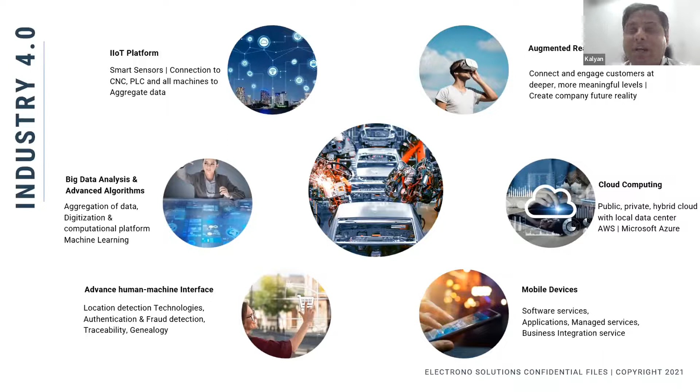Similarly, cloud for across multiple locations and augmented reality एक method है जो बिना product को खोले आपको debug करने के लिए या उसको diagnose करने के लिए एक तरीका है जिससे आपको बेहतर पता चले कि fault क्या हो सकता है और कहाँ पे आपको fix करना है। So quantifying of digital transformation मतलब आपका challenges और उनके

मेन challenges और उनके perspective से कैसे उसको address किया जाए। So first and foremost the objective of automation is to reduce human error, which is one of the major source of quality concern or performance issues। So one of the main source is definitely human error। तो human error को कम करने के लिए एक factor है automation requirement है।

Similarly human error कम करने के लिए एक factor है कि जो data है, data information है और data sources है, वो भी automate होने का वही एक requirement है ताकि human error को कम करें। जैसे human error reduce हो जाएगा, उसका proportional downtime reduction भी expect कर सकते हैं। That is purely from the perspective of availability of the system for performance। हमने खुद observe किया हमारे customer place में जहाँ पे implement हुआ है,

आपको downtime loss reduction by up to 40% आप कम कर सकते हैं। ये data है, इसके लिए मैं थोड़ा आपको live example भी दिखा दूंगा। You can have a look at some of these live examples and how it has helped to improve performance, reduce downtime, and provide more efficiency, which is overall equipment effectiveness at the end of the day, which is a product of performance, availability, and quality।

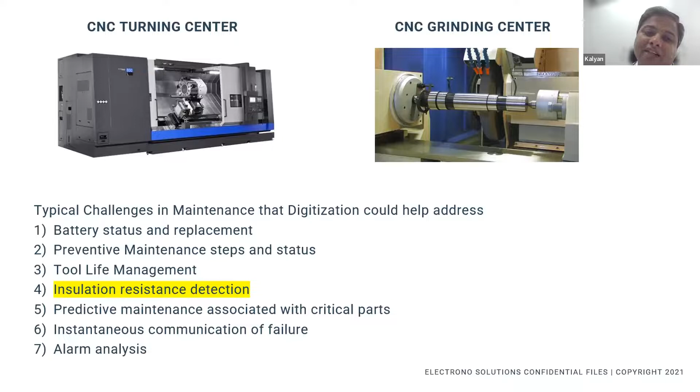ये सब करने के लिए ऑटोमेशन और इंडस्ट्रियल आईओटी में मेन एलिमेंट्स, डिफरेंसेस क्या है। तो ऑटोमेशन में आपको पता है कि स्कैडा लेवल में आप अगर लेके जाएंगे तो स्कैडा में आपने ऑब्जर्व किए होंगे कि कई सारे 1, 2, 3 मशीन, आसपास वाले मशीन या एक सेल जो भी है आपका, उसको कम्युनिकेट करते हुए एक लेवल ऑफ स्क्रीन डेवलप किया जाएगा जहाँ पे आपको पर्टिकुलर इंफॉर्मेशन डिस्प्ले हो जाएगा और अकॉर्डिंगली रियल टाइम इंफॉर्मेशन ऑब्जर्व करने के लिए आपको मिलेगा। उसमें थोड़ा बहुत ऑटोमेशन एलिमेंट्स भी रहेंगे, जैसे व्हाट इज ओके, व्हाट इज नॉट ओके, टाइप्स ऑफ अलार्म्स, पोके योके, ये सब इम्प्लीमेंटेशंस आपको स्काडा में एक लेवल तक मिल जाएगा।

आगे जाके इंडस्ट्रियल आईओटी में एडिशनल एलिमेंट्स क्या है। एडिशनल एलिमेंट्स ये है कि अक्रॉस मल्टीपल सिस्टम्स, आप नॉर्मली ऑब्जर्व करेंगे स्काडा में इट विल बी मोर और लेस कॉमन सिस्टम्स दैट आर कनेक्टेड। बहुत ज्यादा डिफरेंशिएटेड सिस्टम्स में कनेक्ट करने में बहुत मुश्किल होता है स्काडा में भी। फिर भी जेनेरिक कॉमन सिस्टम्स आर द ones which are normally connected। Of course, there are SCADAs wherein you have the facility to connect very different systems also, but that is an evolution of SCADA towards IIoT, actually speaking।

तो यहाँ पे फिजिकल लेयर में आपको बहुत सारे टाइप्स ऑफ मशीन्स, ऑल द वे फ्रॉम CNC मशीन्स, क्रेन्स, कंप्रेसर्स, transformers, chillers, STPs, ETPs, including ERP, can be integrated into a common platform from IoT perspective। ये सब नेटवर्क होके, एक्चुअली एक और चीज है कि नेटवर्किंग प्रोटोकॉल्स जो यूज हो रहे हैं वो भी बहुत एडवांस हुए हैं, ट्रांसफर रेट बहुत ज्यादा है, ताकि आपको ज्यादा से ज्यादा इंफॉर्मेशन मिले मशीन लेयर से और सेंसर लेयर से। डिफरेंट सेंसर्स और सेंसर इंटीग्रेशन भी हो जाएगा इसके साथ।

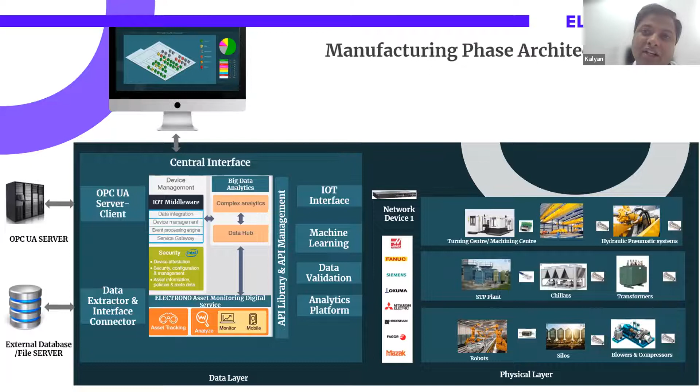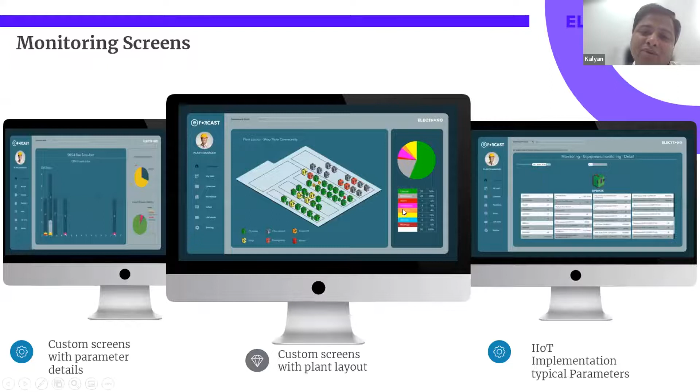Just some examples of how different things can be approached। अब यहाँ पे मिडिल में एक देख सकते हैं कि सेट ऑफ लाइंस एक जगह पे आपको देख के पता चल जाएगा कि इस वाला मशीन में अलार्म्स आ रहे हैं, वो क्लिक करने से आपको पता चलेगा कौन सा अलार्म आ रहा है। तो आपको प्रिपेयर्डनेस के लिए बहुत बेनिफिशियल रहेगा।

और ये दिखाएगा आपको OEE in terms of performance, in terms of operating time, idle time, running time। तो इन सब चीज़ों से आपको एक एनालिटिकल इंफॉर्मेशन मिल जाएगा कि आपका एक पर्टिकुलर मशीन या एक पर्टिकुलर लाइन कैसे बिहेव कर रहा है, कैसे परफॉर्म कर रहे हैं, उसमें क्या रीजंस है वो रुकने के लिए। रीजन कोड करके एक बहुत बड़ा चीज है।

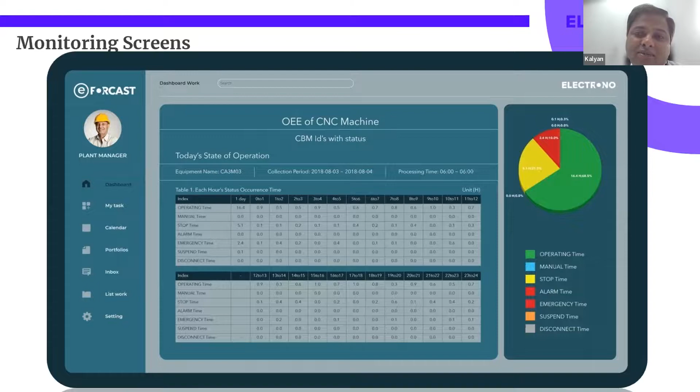अगर वो idle है या breakdown में है, उसका root cause क्या है, उसका reasons क्या है. Is it because of unavailability of raw material? Is it because of operator not being present? Is it because of some breakdown in the machine? Or is it because of the machine running slow? तो ये सब चीजें reason codes के हिसाब से monitor कर सकते हैं.

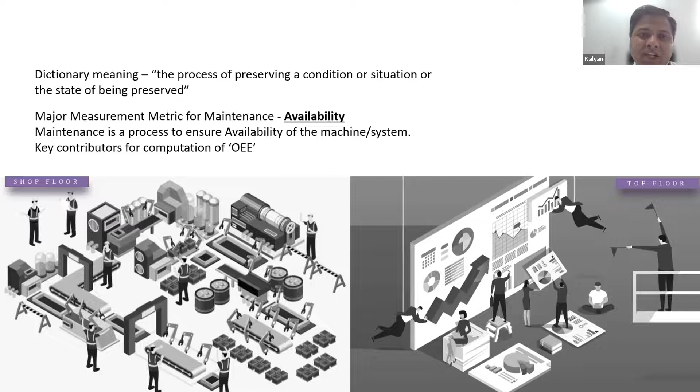Predominantly, I would now touch upon defining what do you mean by availability and what do you mean by maintenance. So as a definition, maintenance is a process of preserving a condition or situation or the state of being preserved. Basically, maintenance is a process of sustaining a particular machine, system or operation, and through that, availability becomes a very important factor.

जैसे अब हमने बताया कि maintenance में बहुत important चीज है कि most of the times it is a fact that complex machines के साथ आप deal कर रहे हैं. It is quite obvious that we really don't have the complete understanding of every single type of machine all the time to be able to assess whether a given machine will operate or fail, or when it fails, what is the root cause and how do you fix it.

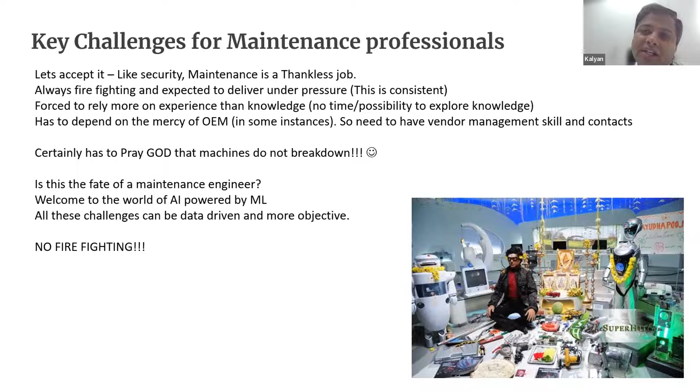तो इस particular ambiguity और uncertain situation को handle करने के लिए definitely alarm analysis and predictive maintenance is the approach. Lot of machine learning and artificial intelligence algorithms are involved in assessing and predicting the root cause of failures based on multiple alarms and the possibility of occurrence of those alarms, and helping you to take a decision कि इस particular machine या system में हम एक breakdown को कैसे avoid कर सकते हैं. And आप actually इस unplanned breakdown को planned maintenance में convert कर सकते हैं.

जैसे आपका maintenance schedule है हर एक Sunday को या हर एक Saturday को एक particular shift में आप मशीन को down लेंगे और maintain कर पाएंगे. तो ज्यादा से ज्यादा चीजें जो unplanned downtime category में आ रहा है उसको आप convert कर सकते हैं planned downtime लेके. That is one of the major part in all of these.

With this, I would now move towards production. Production में आपको critical चीजें होते हैं. First and foremost, target. आपके हर एक production process में आपको एक work order होता है, उसमें आपको एक part number define होके उसका कितना quantity produce होना है उसका target definition रहता है.

उसके हिसाब से आपका एक cycle time भी define होता है obviously, and by that cycle time you also define what should be the number of parts that you need to produce, which is again defined as target, and then you have actual which says what was actually produced. और इसके लिए reason होता है, sometimes or rather most of the times you will notice that actual will be lesser than the target, and there are reasons for that.

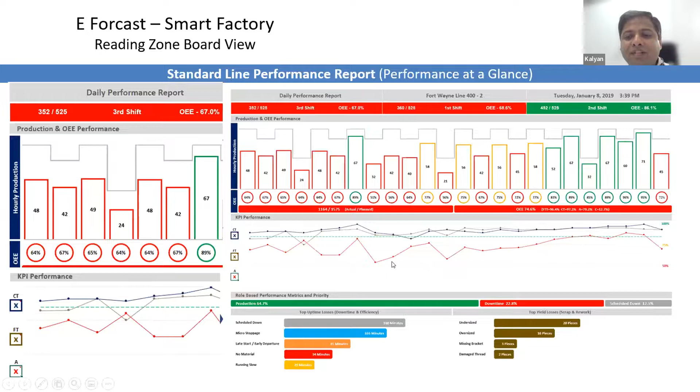So these are some of the main things. The rest of the things are all some examples of how different conditions can be observed.

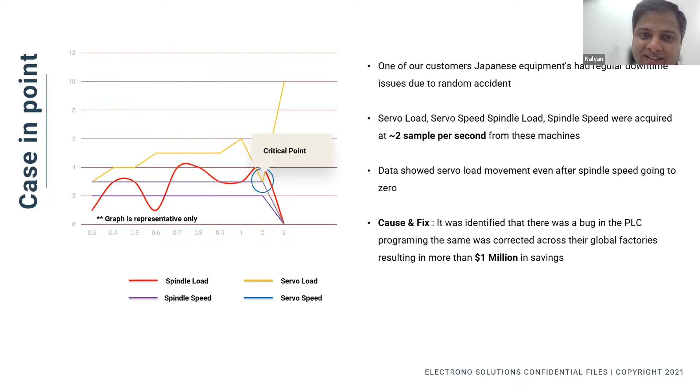एंड नॉट जस्ट इन आवर कस्टमर साइड, दिस पर्टिकुलर OEM हैज इंप्लीमेंटेड दिस सॉल्यूशन अक्रॉस द वर्ल्ड। तो ऐसे भी होते हैं चीजें और सिचुएशंस जहां पे आपको डेटा एनालिटिक्स के माध्यम से ये सब आइडेंटिफाई किया जा सकता है। ऑब्वियसली इन earlier days technologies this was absolutely not possible। अभी के इंडस्ट्रियल IoT के माध्यम से ये एक बहुत बड़ा चीज है जो हम कर सकते हैं।

तो these are some of the example dashboards, I'm just showing you कैसे दिखता है, क्या है, just for your information कि मोबाइल में भी इंफॉर्मेशन मिल जाएगा, अलार्म एनालिसिस मिल जाएगा। तो ये सब तो पॉसिबिलिटी है, ये मिल जाएगा बोलना अलग है। आपके रिक्वायरमेंट जो है उसके हिसाब से कैसे हम टेलर मेड सॉल्यूशन बनाएंगे, वो बहुत इंपॉर्टेंट चीज है।

उसको एनालाइज करना बहुत इंपॉर्टेंट है, क्योंकि हर एक सिनेरियो में, हर एक कस्टमर के प्रोसेस में बहुत सारे वेरिएशंस रहते हैं। देयर इज नथिंग कॉल्ड एज वन साइज फिट्स ऑल। ऐसा नहीं है कि एक जगह पे जो इम्प्लीमेंट हो उसी को बिना कुछ बदले या मॉडिफाई किए दूसरी जगह पे डाल दोगे तो वो काम करेगा, ऐसा तो है नहीं। कस्टमाइजेशन का जरूरत पड़ेगा। फिलहाल in the current context of technology definitely there is a role for customization।

ऐसा नहीं है कि आपने एक बार इंस्टॉल कर दिया तो सब कुछ चलेगा, ये भी नहीं है।

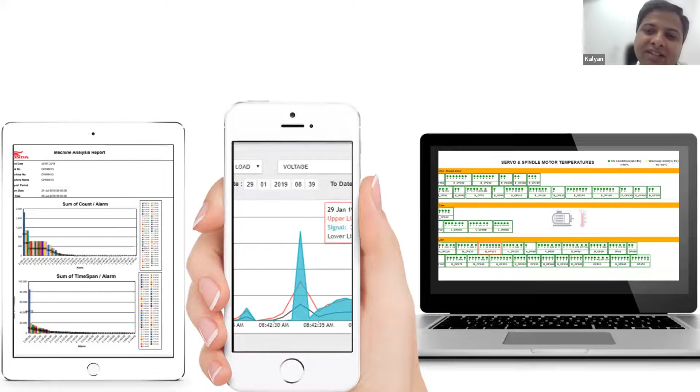Different elements of this in terms of key areas of focus अगर आप identify करना चाहते हैं तो I think these are some of the low hanging fruit fast cut implementation benefit areas, जैसे tool life management, daily machine check sheet, और alarm analysis and root cause analysis। ये तीन जो है, I think these three could be your first low hanging fruit start points in your journey for digital transformation using Industry 4.0।

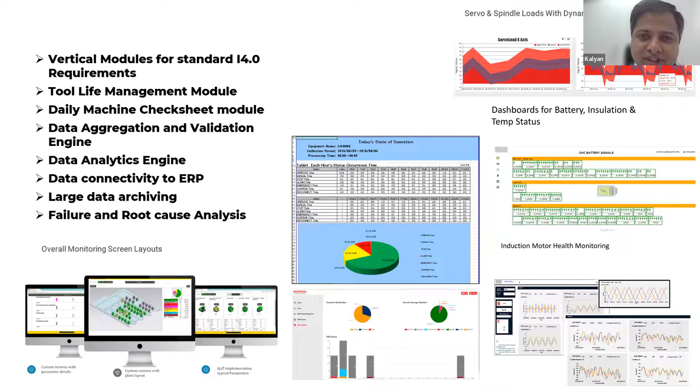I think with this, I would kind of pause and I would like to hear more questions। आपका कोई सिनेरियो है, आपका कोई एक्सपीरियंस है, कोई सिचुएशन है जो आप जानना चाहते हैं कि वो डिजिटल ट्रांसफॉर्मेशन के माध्यम से कैसे इंप्रूव किया जाए, अगर ऐसा कुछ है तो आई थिंक दैट इज मोर इम्पोर्टेंट, डिस्कशन करना बहुत जरूरी पड़ेगा। तो विद दैट आई वुड कम टू द एंड ऑफ माय क्विक सेशन on convergence of automation and industrial IoT in the Industry 4.0 scenario.

So if there are any questions, we could have a conversation.